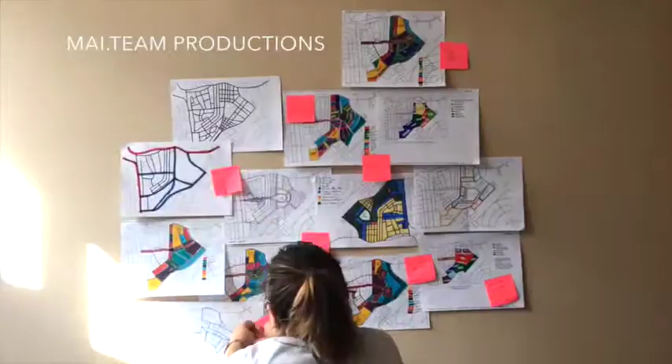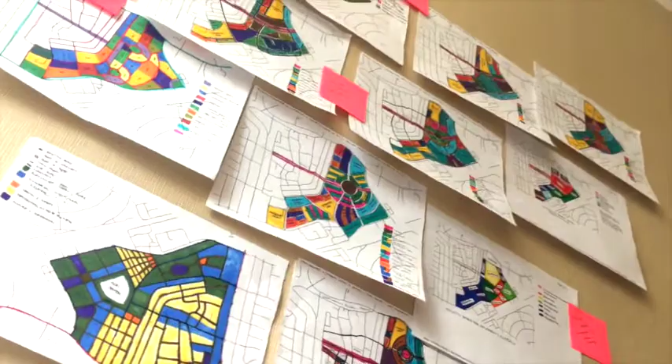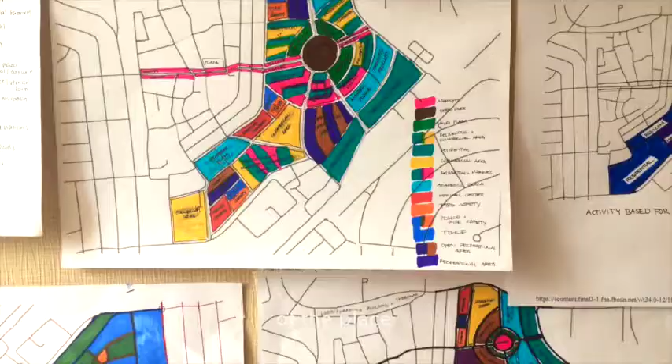Based on the problems of Krus, we wanted to have a development to cater to the higher demographic of the place. Since the higher demographic is mostly students and seniors, we want academics and leisure to be among our priorities.

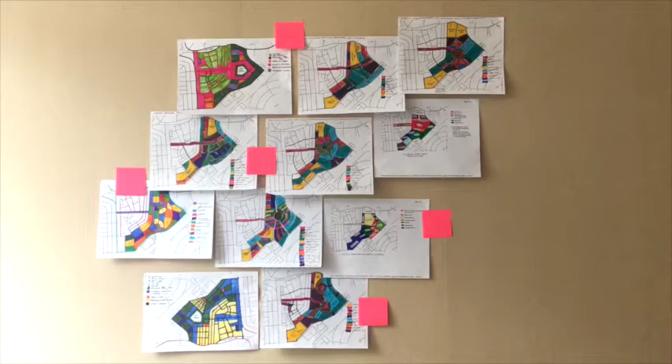Going to Ligas was fun yet difficult because we didn't know anything about the place. When we went there, it took time because we still had to find where it is. But it became easier when we saw signs that we were near Ligas, and there's an arc that shows Ligas.

The community in Ligas is really congested and crowded, but people were really nice. During the morning it wasn't scary—we went there some mornings, and when we were there it wasn't that scary going around inside Krus na Ligas.

Yep, this is the gym here. No. The path is just over there.

Walking around Krus na Ligas, people were looking because they really knew we weren't from there. People around Krus na Ligas really know each other in their area. Kids were really talking to us, but they were nice, compared to other places I've visited. Krus na Ligas was a friendly community.

The streets in Krus were very narrow and very congested. Part of the reason for this was that they were used for many purposes, such as food stalls, tricycle parking, and pedestrian crossing.

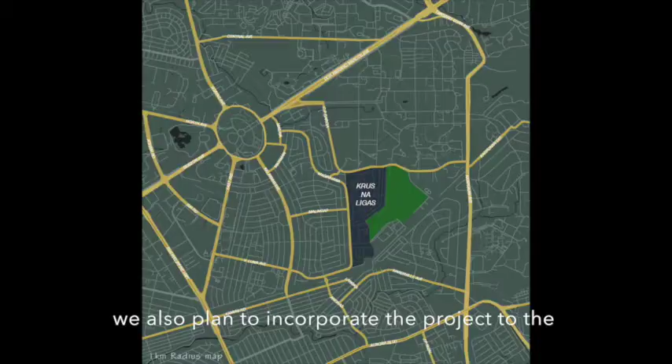We also plan to incorporate the project into the curriculum of schools like UP Diliman, Ateneo de Manila, and Miriam College, because the following departments can cater to the different sectors that we have for the project.

For example, for the agricultural part, students from the engineering and science departments can help out, while the business and economic courses can help out with the commercial part of the project.

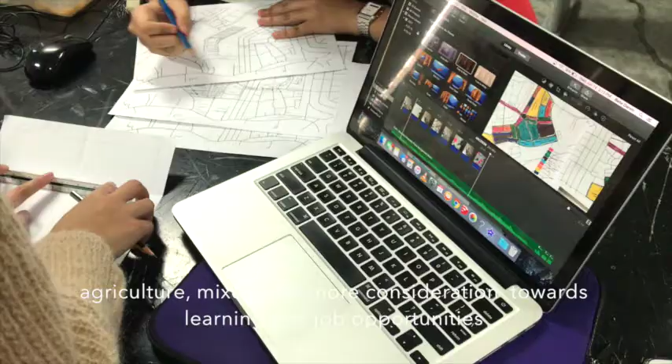So from there, we started to go towards the path of a more academic-based system where we still have organic markets and agriculture, mixed with more consideration towards learning and job opportunities.

The criticisms we received from our classmates also had to do with the agri-commercial part of our project that we proposed earlier on. This was because they didn't see if the urban farming thing was really original.

Because it's already done in other parts, they questioned if it would work out in Quezon City or in the Krus na Ligas area, if it would appeal to the people, and if it would also create enough job opportunities besides farming.

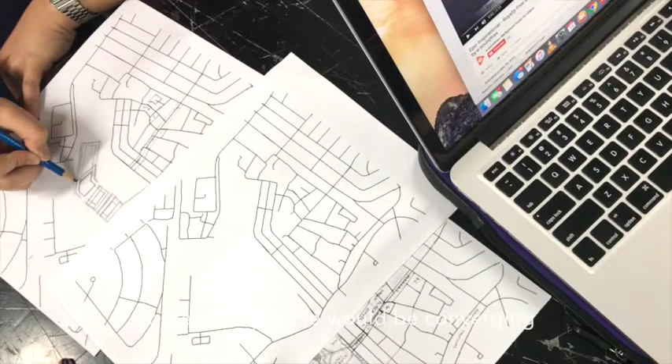Since our site and the surrounding communities around it form a very diverse community, we want to incorporate urban equity. Urban equity is more about equality around the area, where most people would be converging into one place, making it as one.

So they have this framework that involves challenges within the area and having deliverables and outcomes.

So we have this bunch of case studies that we want to incorporate into our site. First is the farming kindergarten, and this is more about learning the craft.

Then in Sky Greens, it's more of applying what we've learned from the case studies, like the vertical sky gardens and vertical farms. And the farmery is more about selling what we were able to produce from the Sky Greens.

And Sunqiao is more of the integration of all three, an output of what we really want to do. So the whole project is more about learn, create, and benefit.

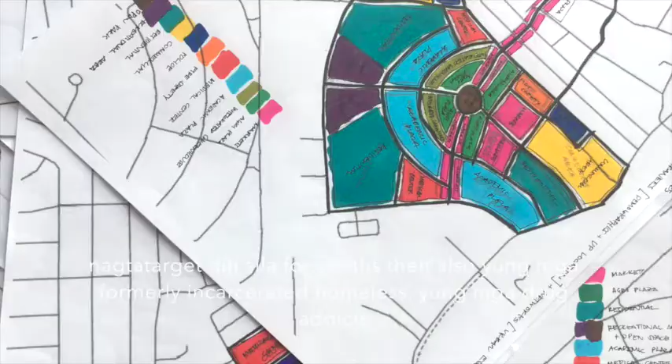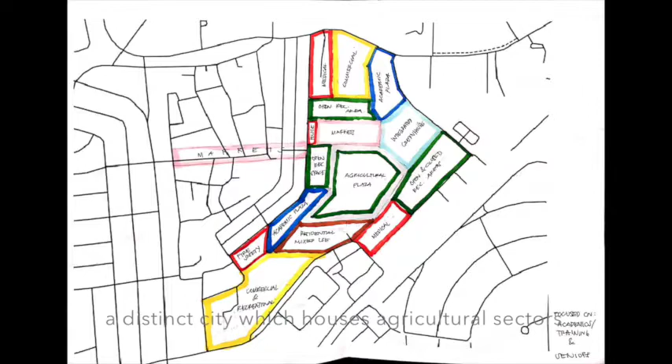So we decided to incorporate different city theories into our project. First, we have the garden city theory. The garden city theory is a distinct city which houses agricultural sectors as well as urban sectors.

It is designed for health, life, and industry. So the main point of the garden city theory is interconnection, interaction, and a rich social life.

The garden city theory is separated into two categories: the city and the country. The country houses all the agricultural needs of the district, while the city caters to the more commercial places.

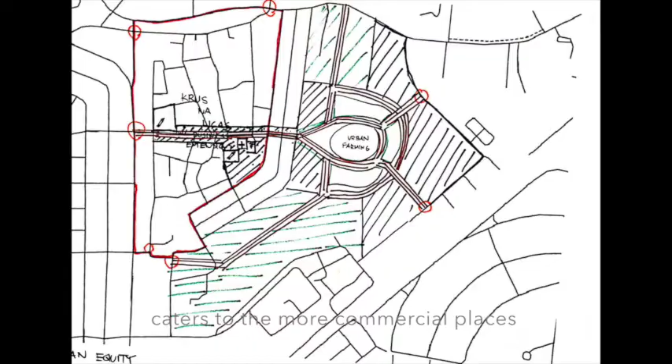Next, we have the satellite city theory. This one caters more to job opportunities for the people.

Basically, you have a main city that branches out into different other sectors that are independent. Each one is independent, but they still connect with the main city.

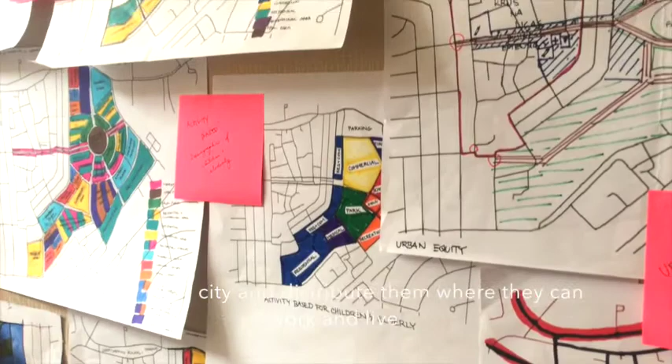The goal of this city theory is to evacuate excess population in the main city and distribute them where they can work and live, while not cutting off the connection with the main city.

This is the road network we're proposing to develop in Krus na Ligas. These networks will create a better connection between Krus na Ligas, the development, and the vicinity around the site.

These are the road networks we're proposing for the mobility of the development. These roads will connect our proposed community to the different amenities and services within it, and they will also have sidewalks along them.

The road networks we created within our development in Krus na Ligas will connect to the major roads outside our site, including CP Garcia, Maginhawa, and Purok Aguinaldo.

For our agriculture, we have 4 areas for it. All these 4 areas will have vertical farming, and there will be organic markets integrated within them at the ground floor. These markets at the ground floor will have produce from the vertical farms.

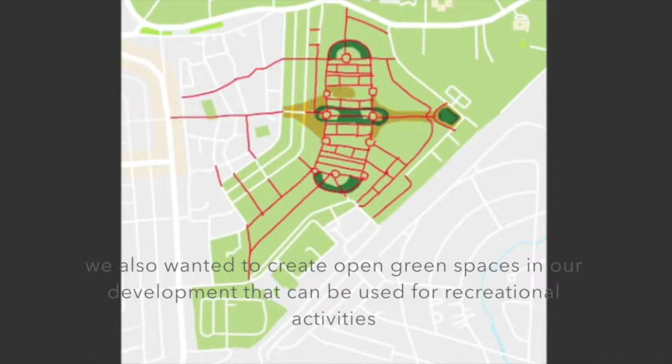We wanted to integrate green spaces in Krus na Ligas because there are not a lot of them in the vicinity. This is also to create a sense of refreshment from the urban density. We also wanted to create open green spaces in our development that can be used for recreational activities, evacuation areas, parks, and even for future expansion. These open spaces will also reduce the air pollution in the area. The positive psychological effect of seeing plants in open green spaces will also benefit the majority of our demographic, which are minors and seniors.

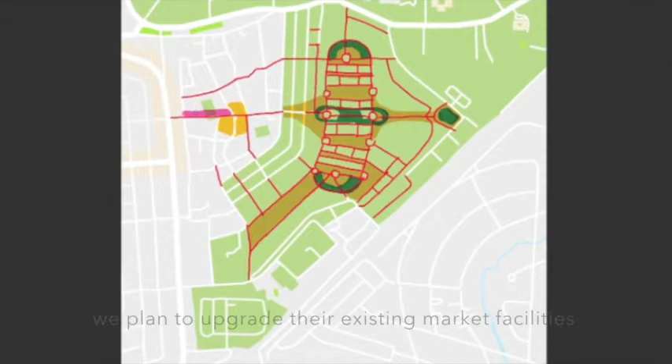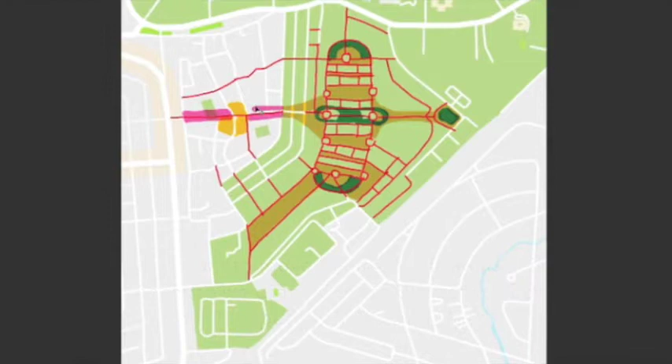The marketplace along P. Francisco Street will be part of our development. We plan to upgrade their existing market facilities. Like the integrated markets below the vertical farms, these markets will sell organic produce. We didn't want to move the market away from its existing place because we didn't want to disrupt the flow and work of people in Krus na Ligas. It also serves as another entry point to the development.

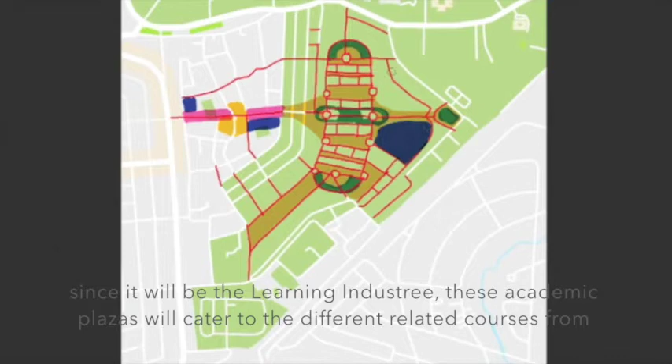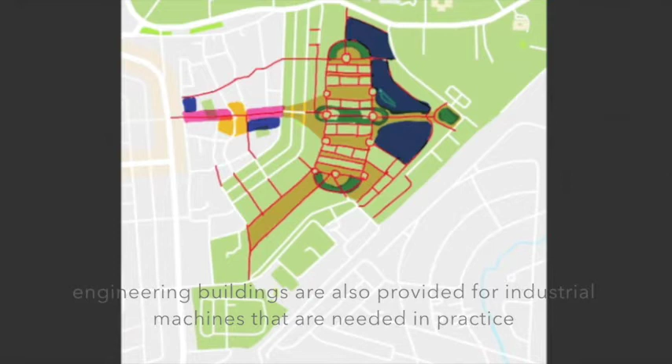Academic plazas will be the focus of our development. Since it will be the Learning Industree, these academic plazas will cater to the different related courses from UP, Ateneo, and Miriam in application and practicum. Engineering buildings are also provided for industrial machines that are needed in practice. These academic plazas will be in close proximity to residential areas for the convenience of trainees.

Residential areas will be provided for relocation of informal settlers, affordable housing, and for dormitories for the trainees. These residential areas will be near the academic plazas and recreational areas to be accessible to the users.

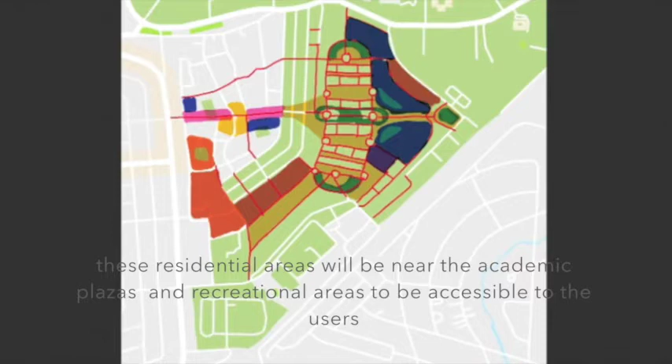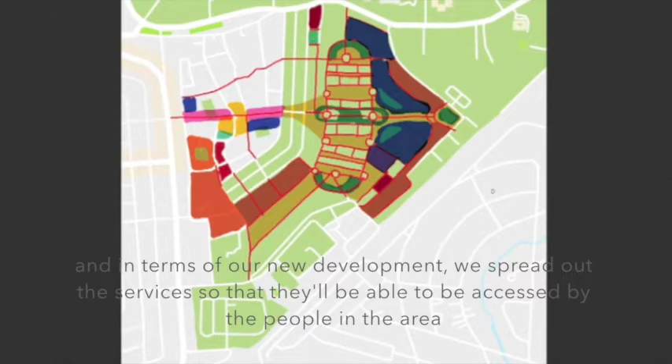So for our police station, fire station, and medical center, we spread it out amongst our site. In KNL, these services are put in the land of the informal settlers since we relocated them already in our site. In terms of our new development, we spread out the services so that they'll be able to be accessed by the people in the area.

Parking spaces are also provided in the development and also in Krus na Ligas. The parking in Krus na Ligas is actually a construction site, so we plan to convert it into a parking area.

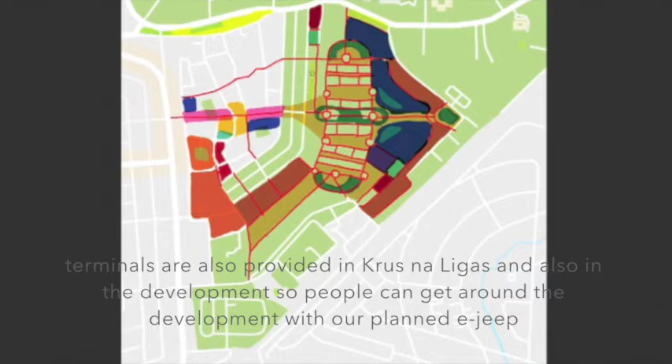Terminals are also provided in Krus na Ligas and also in the development so that people can get around the development with our planned e-jeeps and other transportation modes.

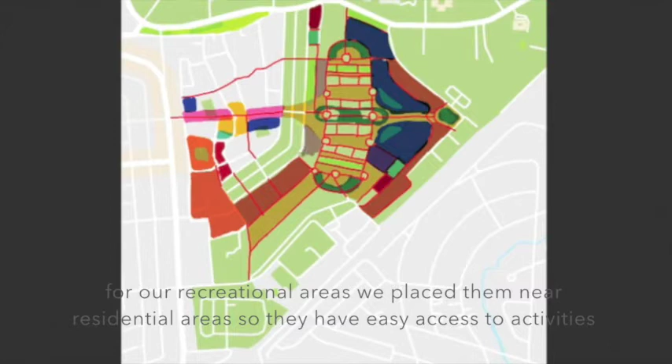For our recreational areas, we place them near residential areas so that they have easy access to activities. For these, we have activities for elderly, adults, youth, and kids. Usually for the younger generations, their activities are more hardcore, such as soccer and swimming, while the elderly have more laid back activities such as yoga and tai chi.

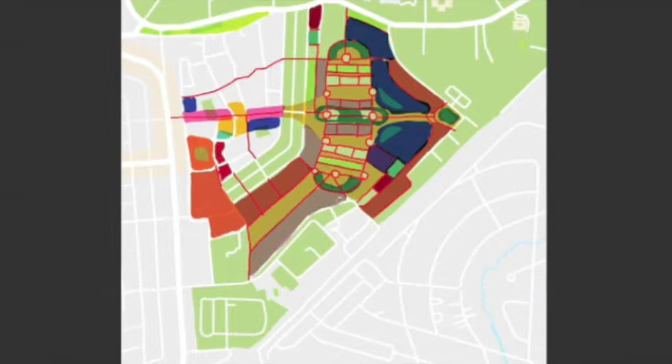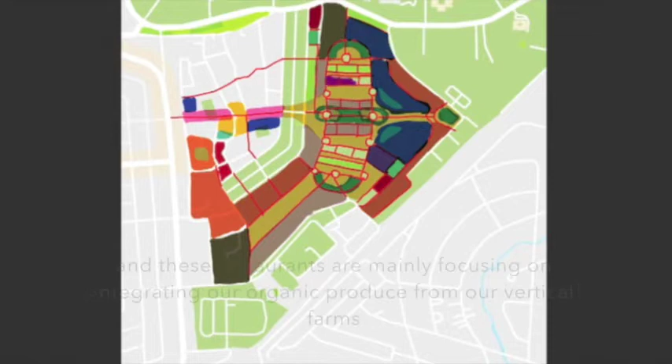Our commercial areas are located near our main road, so that would be CP Garcia and Maginhawa. These commercial areas sell retail and they're also for small businesses. Our restaurants are located near our agricultural areas, and these restaurants are mainly focusing on integrating our organic produce from our vertical farms.

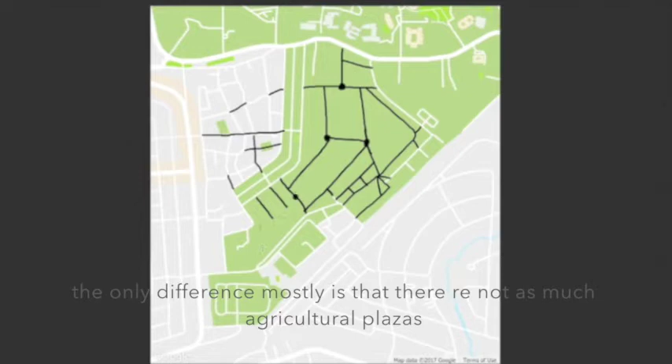Our second variation is very similar to our first variation in terms of space programming. The road networks are very similar to the first as well. The only difference mostly is that there are not as much agricultural plazas and not as much open green spaces as the first variation.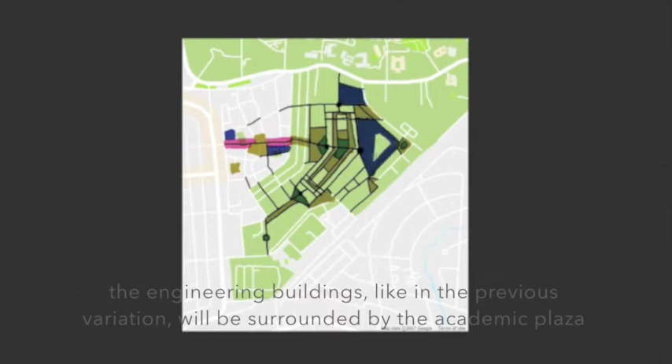The academic plazas in this map variation occupy a larger continuous area in the site. This is to give students a more focused work environment without having to transfer from one place to another. The engineering buildings, like in the previous variation, will be surrounded by the academic plaza to muffle the sounds made by the machinery, so as to not disturb the residential area.

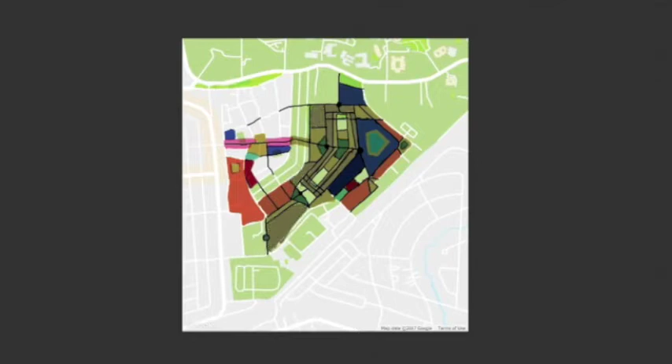The third variation is also quite similar to the first variation. However, there are some changes in terms of area and spacing of the different amenities of the community. There are more open green spaces allotted in this variation and smaller recreational areas. There is again a big portion for academic plazas.

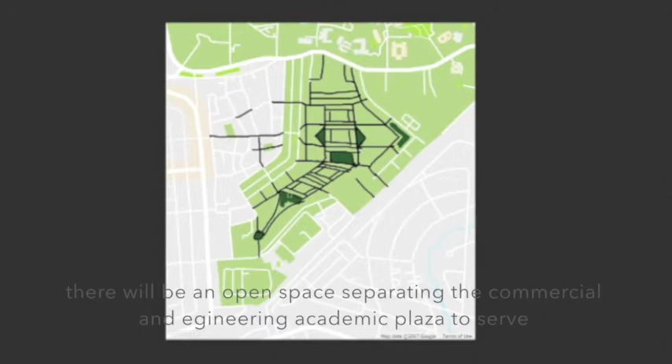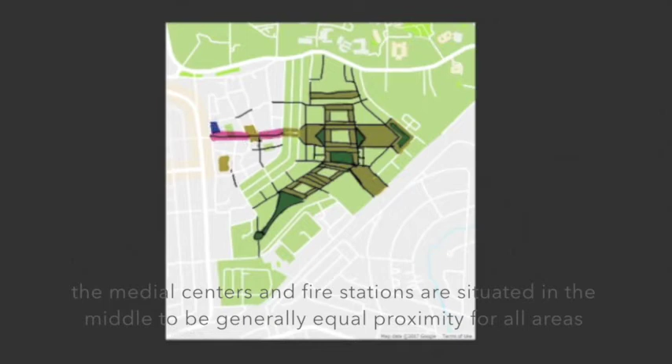In this variation, the plaza is closer to CP Garcia and faces UP with a commercial area in between the two academic plazas. There will be an open space separating the commercial and engineering academic plaza to serve as a transition space. The medical centers and fire stations are situated in the middle to be generally equal proximity for all areas.

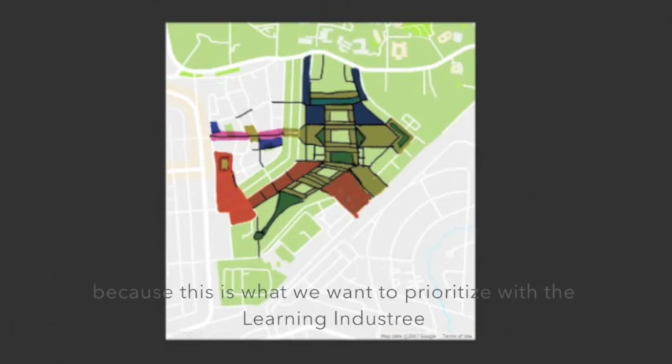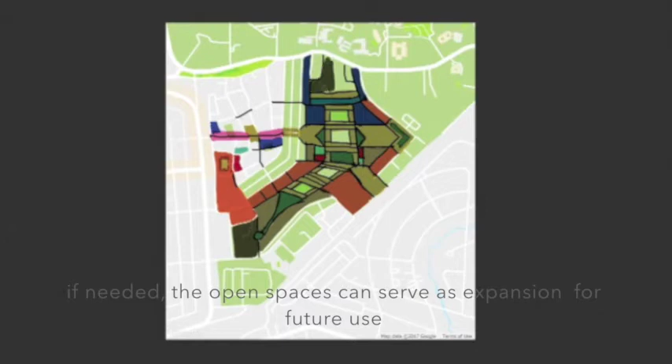To sum up all three programs, all of them are focused on academic purposes and housing because this is what we want to prioritize with the Learning Industree. These areas will also have the densest population percentage based on our 2050 projection of the demographics. If needed, the open spaces can serve as expansion for future use.

This is the first step towards the actualization of our vision for the site and the community: education, opportunity, exposure, and connectivity. These will be the foundations that our development will be built upon as we further our journey into a new urban community.